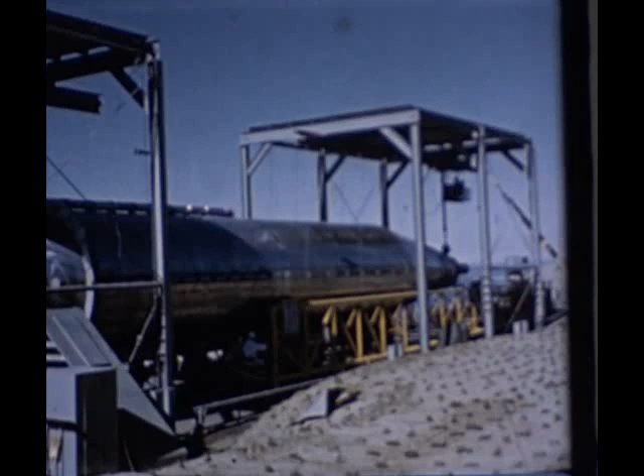The weapon system consists essentially of surface-to-surface ballistic missiles, their handling and transportation equipment, their launching installations and equipment, their ground-based guidance elements,

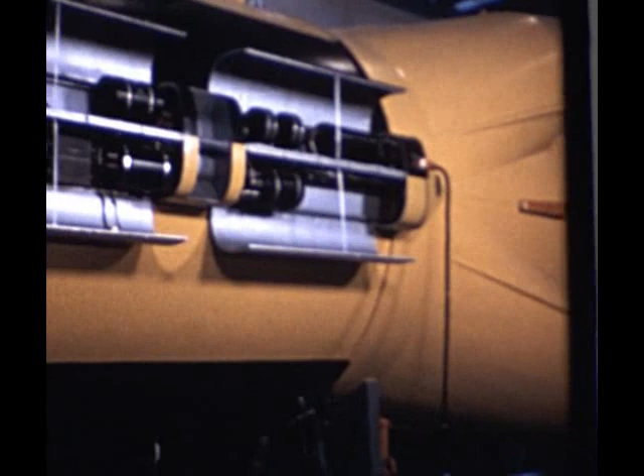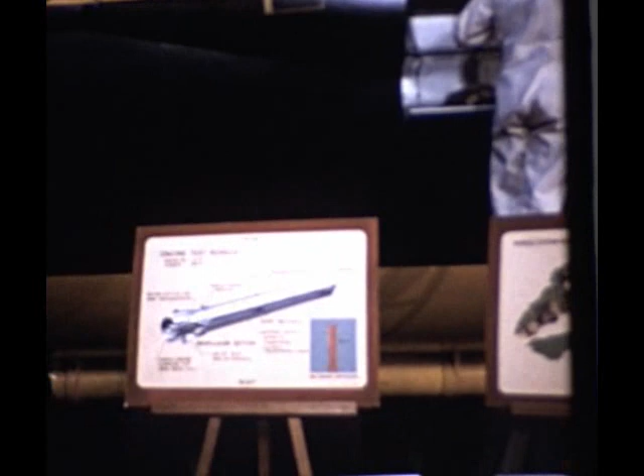missile-borne guidance elements, and operations bases and associated installations, facilities, and equipment.

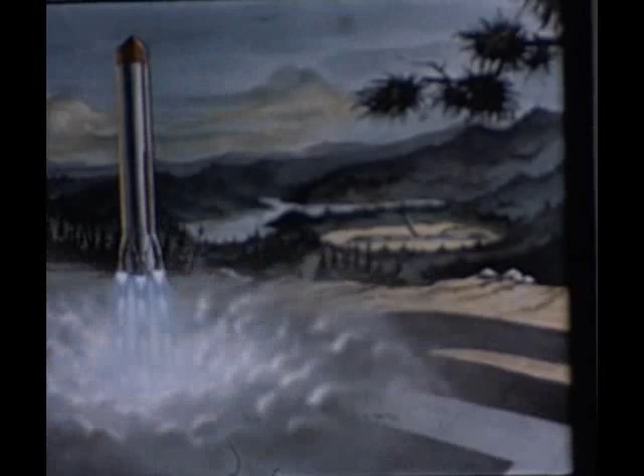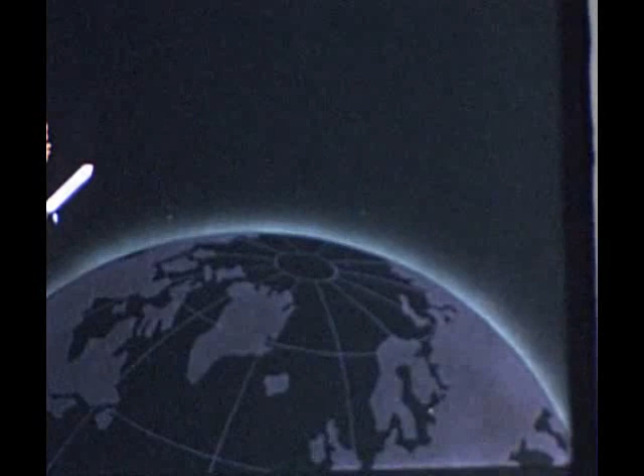The missile is launched vertically and guided during powered flight to coincide at a power cutoff point above the atmosphere with a ballistic trajectory from this point to the target. Guidance and propulsion end simultaneously at this point, some 5 minutes after launching, and the nose containing the warhead is separated to continue for another 25 minutes in a free fall along the gravitational ellipse.

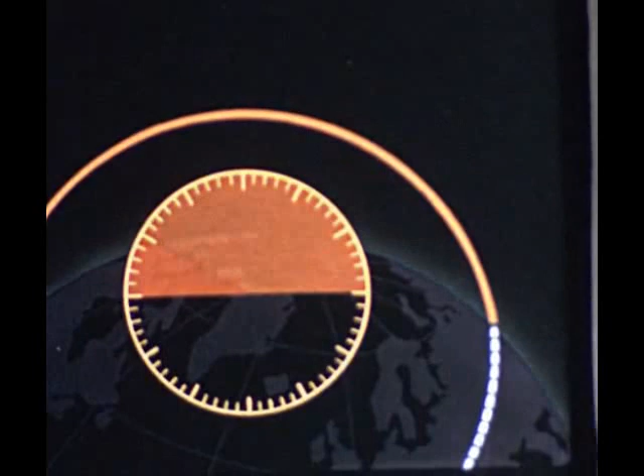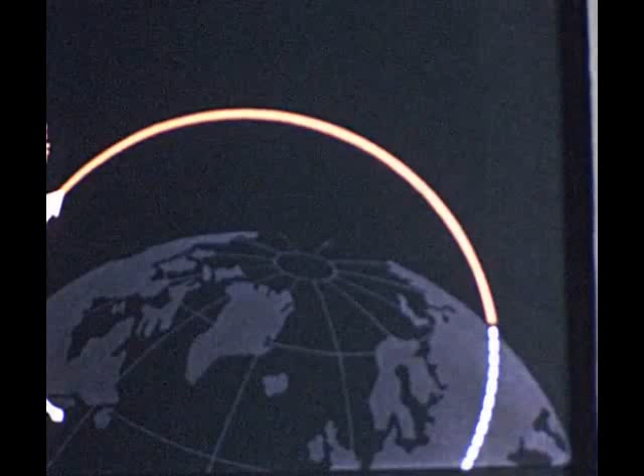The entire guidance problem therefore consists in providing the missile with the correct heading and speed at power cutoff while still over friendly territory. A programmed autopilot stabilizes the missile and directs it onto the correct heading, and an integrating accelerometer cuts off the propulsion when the missile has attained the correct speed.

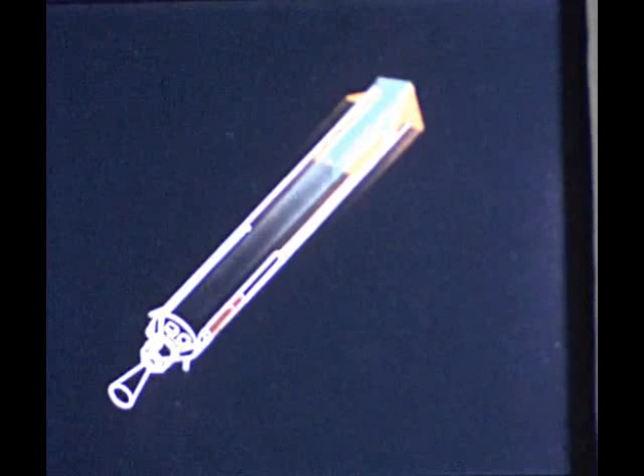If these inertial elements can be developed to the required precision, they will be self-sufficient. Or they can be built with components now available and radio-supervised by command-control signals from a precise microwave tracking and computing station on the ground.

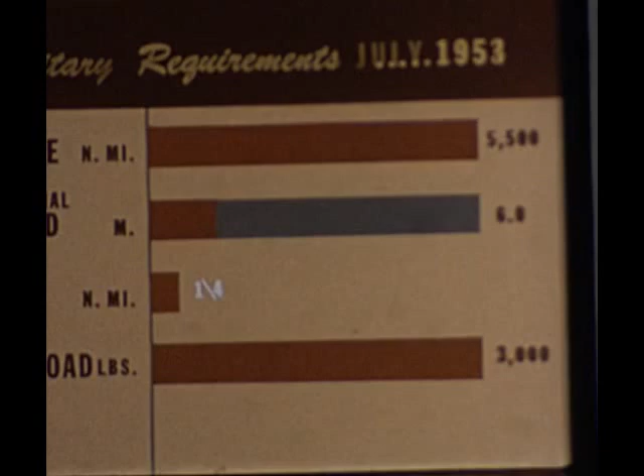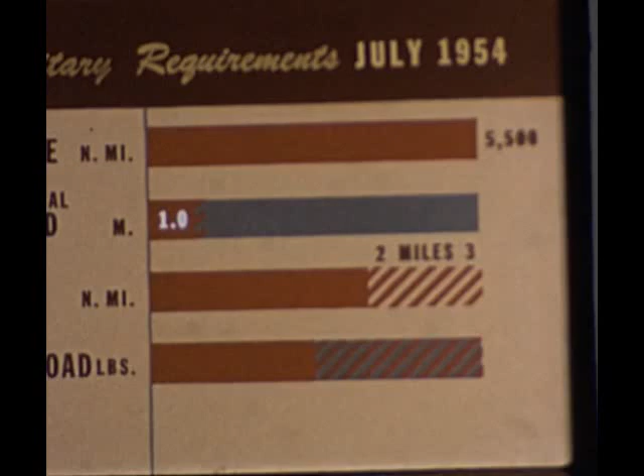The Atlas military requirements were under continual review during the period of this report. Some of the requirements were relaxed to provide for a missile with a range of 5,500 nautical miles, a terminal speed near Mach 1, a circle of probable error of from 2 to 3 nautical miles, and an atomic or thermonuclear warhead weighing between 1,500 and 3,000 pounds.

From July to October, development effort was accelerated on the components of a 1.5-stage missile, the XB-65, that could deliver a warhead weighing up to 3,000 pounds. A full-scale body section was built to verify the design, construction, and dynamic characteristics of the pure monocoque airframe, and to test some of the missile handling and transportation arrangements.

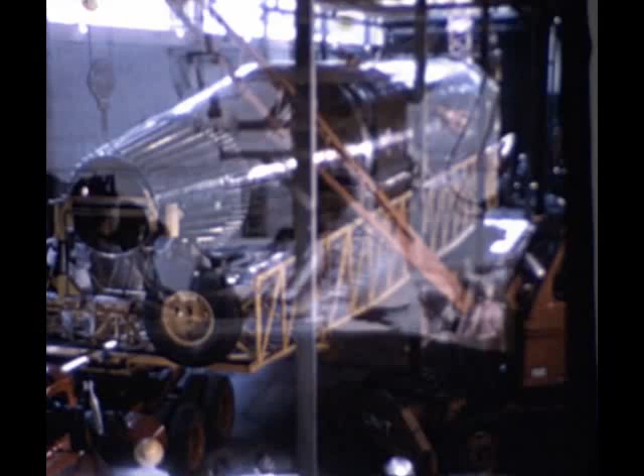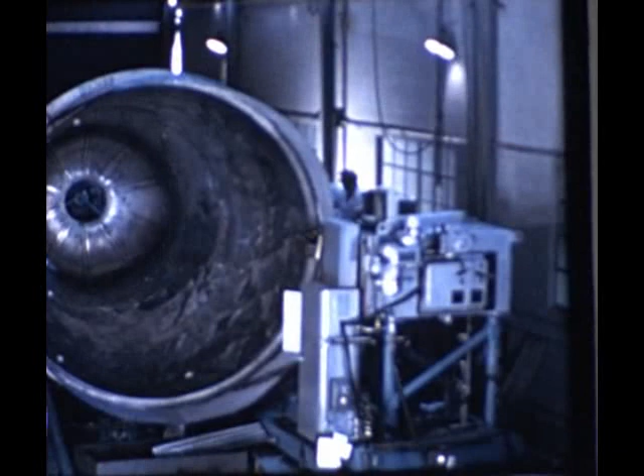The walls are thin stainless steel, varying between .016 and .040 gauge. The cylinder is divided by a bulkhead to form 2 integral tandem tanks for the fuel and oxidizer. The work is positioned in the fixture by fiberglass tooling rings, cemented to each skin section as it is added.

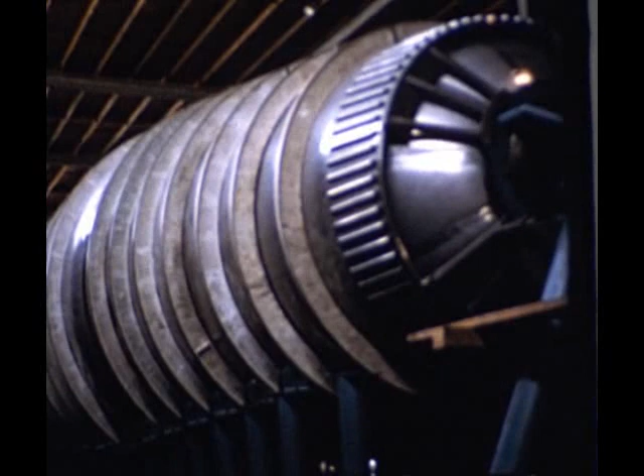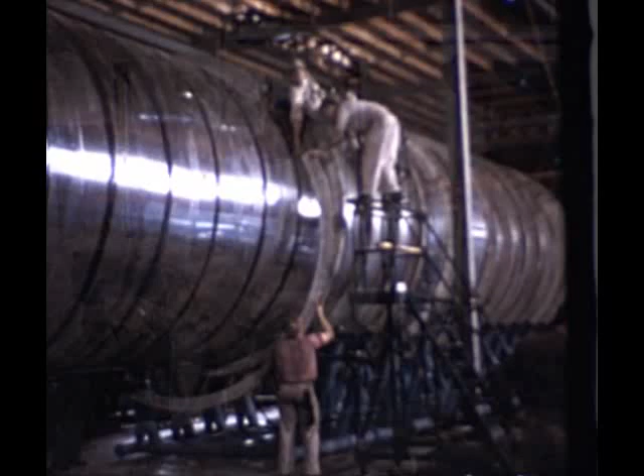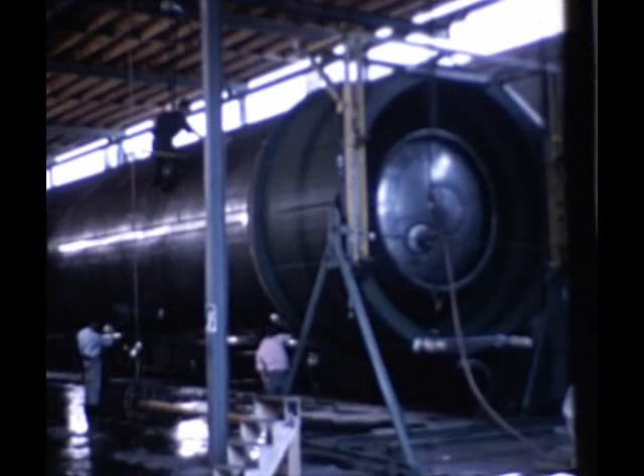When welding has been completed, the fuel and oxidizer tanks are pressurized to provide the necessary stiffening. The tooling rings are then removed, and the pure monocoque cylinder is supported only at the extreme ends. It is 75 feet long and 10 feet in diameter, and weighs only 5,700 pounds.

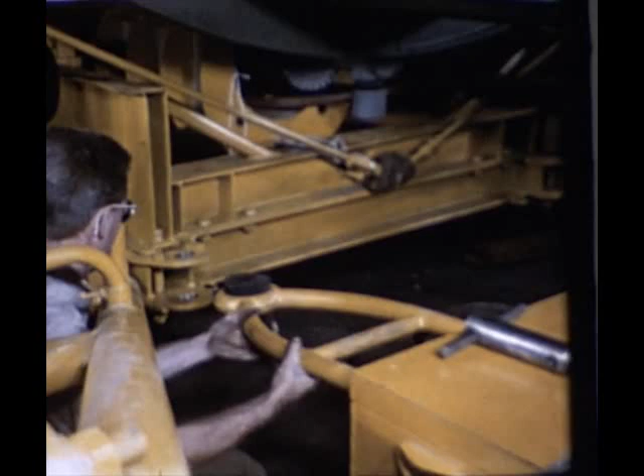When the external fittings have been attached, the pressurized tank is loaded onto the handling trailer, where it is also supported only at the ends. The specially designed pressurization trailer is attached to automatically maintain the correct tank pressures in transit. Here we see workmen walking freely on top of the pressurized tank while covering it for the trip to the test site.

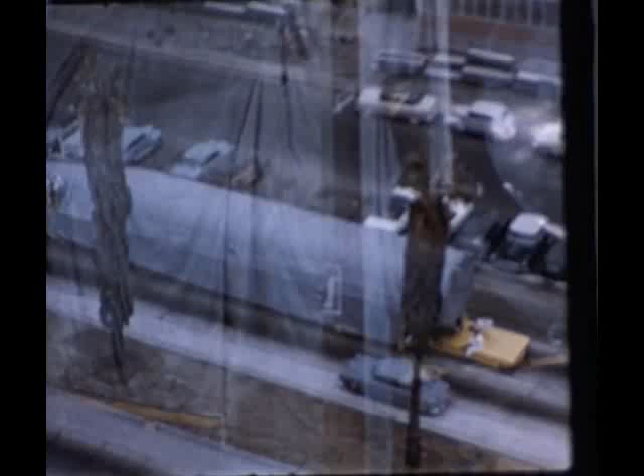En route to the test site, the loaded trailer negotiates normal city streets and traffic without incident. The rear wheels of the trailer are power steered by dual steering wheels, enabling it to make an uninterrupted turn around this 150-degree downgrade bend in the narrow road approaching the test site on Point Loma.

The test site occupies about 2 acres of military reservation on the seaward side of the point. It was completed in September, especially for the Atlas tank test program. Besides the 120-foot tower for vertical pressure, flow, and drop tests, it includes 2 metal storage sheds, a reinforced concrete control center, and a horizontal fixture for weight, balance, and vibration testing.

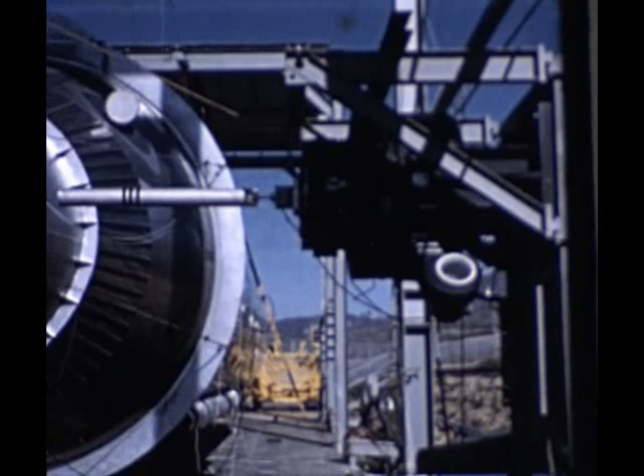After dummy nose and engine masses are attached for dynamic simulation, the test article is installed in the horizontal test fixture. Tests are then conducted for determination of the vibration modes and frequencies. Later, the test article is reloaded on the trailer for transfer to the vertical test fixture.

By releasing the tension in the upper of these aft extension struts of the trailer, the entire tank structure can be stretched by its own weight in order to depressurize it for inspection and modification.

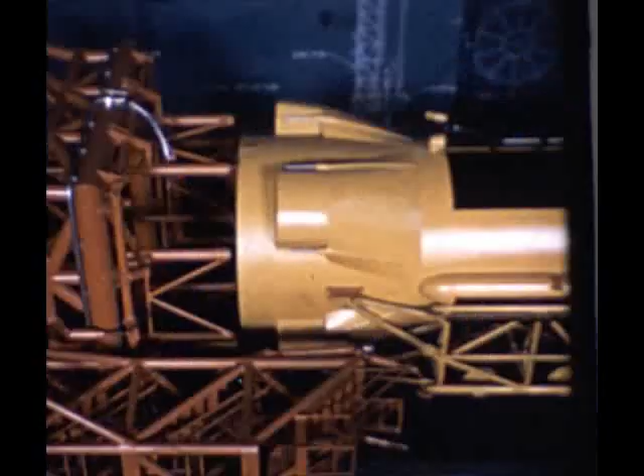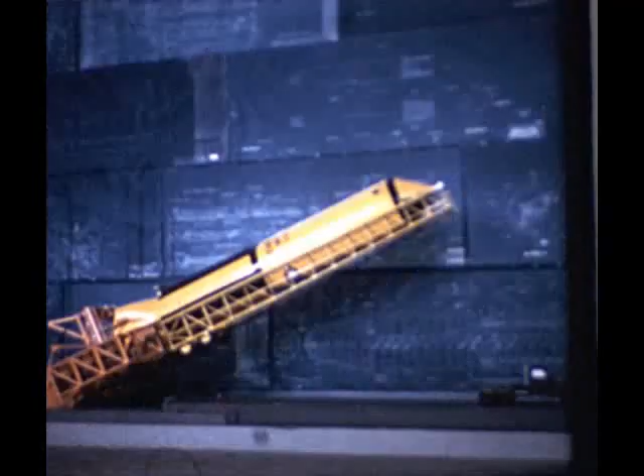The trailer is also designed to be used as part of the cantilever arm for erecting the missile on the launcher in the pressurized condition, as demonstrated here with a 10th scale model of a proposed Atlas flight test vehicle. This use of the trailer avoids the necessity of adding the weight of erection fittings to the missile.

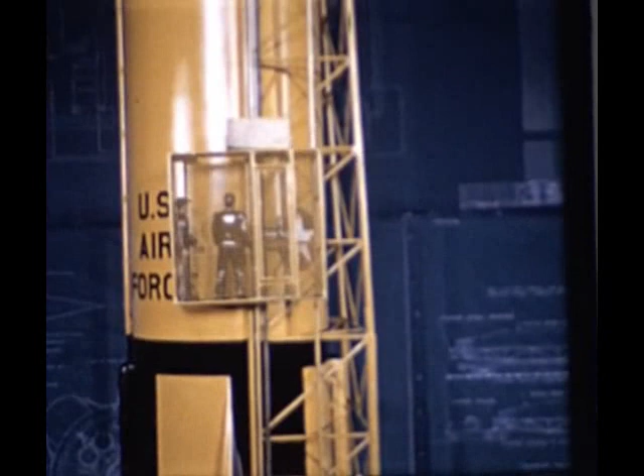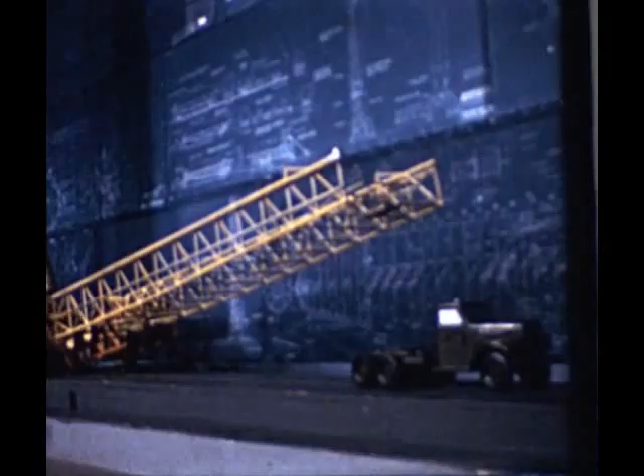Built-in powered elevators on the missile trailer provide access to missile components and systems for pre-flight preparations. The trailer workstand is kept in place on the launcher until all such preparations have been made, when it is lowered back to the ground. The trailer is detached from the launcher arm and hauled clear for the launching operation.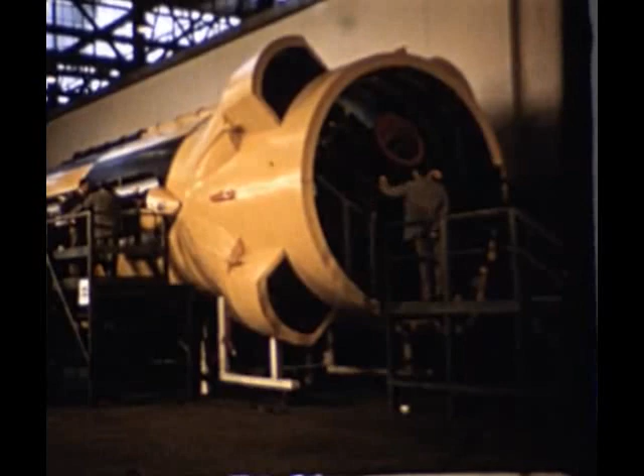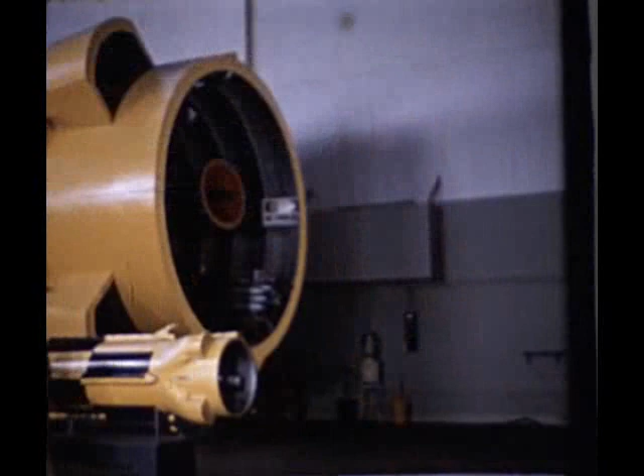In the program review in July, a mock-up of this proposed flight test vehicle was authorized, and on 9 and 10 November, it was officially inspected by the Air Force Development Engineering Board. The proposed test vehicle was designed to provide data on single-engine propulsion system performance in flight, but incorporated a number of other basic design features of the operational missile.

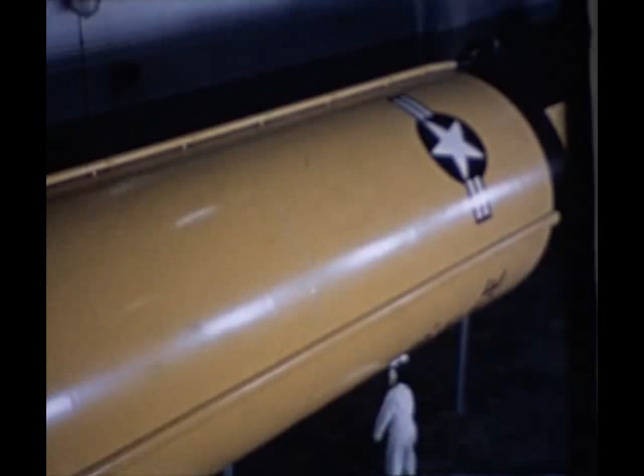In this design configuration, the missile is 82 feet long and 12 feet in diameter. Its launching weight is 80,000 pounds, of which 66,200 pounds are propellants, JP4 gasoline, and liquid oxygen. The test nose serves mainly as a fairing for the missile body and is non-separable in flight. The body or tank section is of the same lightweight stainless steel construction as the Model 7-4 test article and is continuously pressure stressed in the same manner.

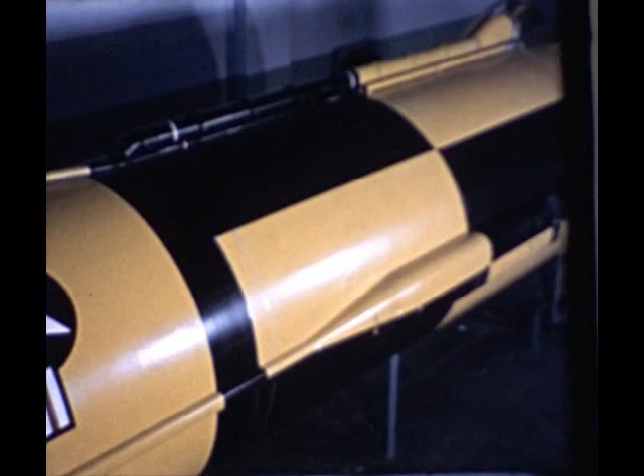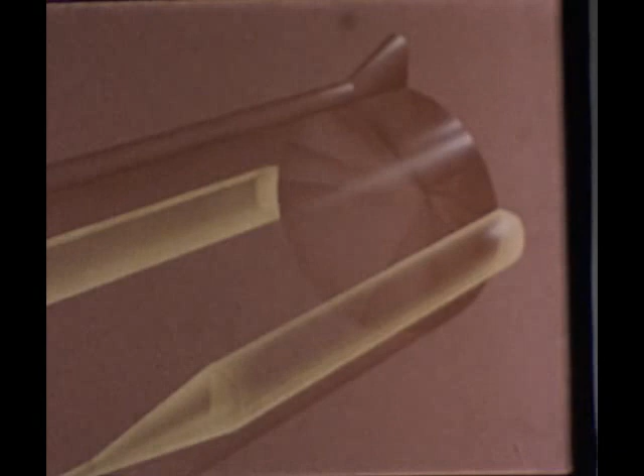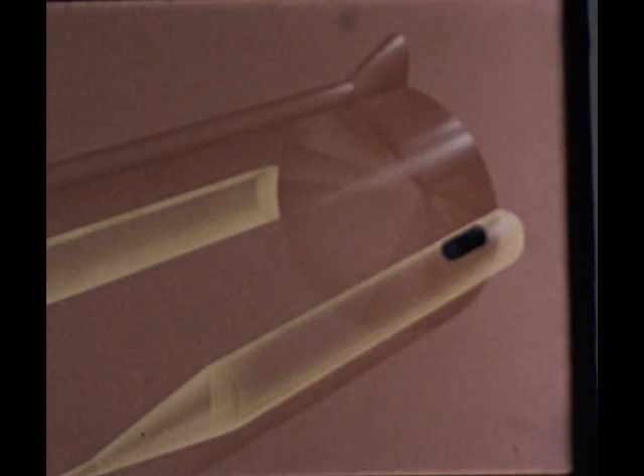Plumbing, wiring, and electronic equipment are all mounted externally in 2 equipment pods, one on each side of the body. As a reliability feature, both of the pods contain a telemetering and a command-destruct system, each complete with its own power supply and antenna. The aft section of one pod contains the electronics package for the fuel and oxidizer ratio control system. The opposite pod contains the primary power battery, a DC to AC inverter, the electronic and inertial elements of the autopilot system, and a radio microwave transponder.

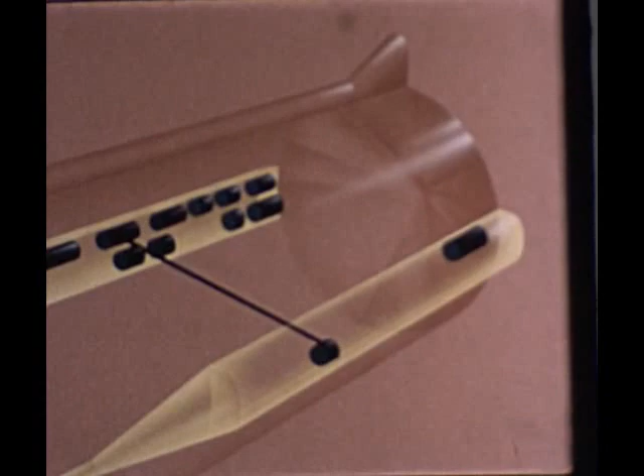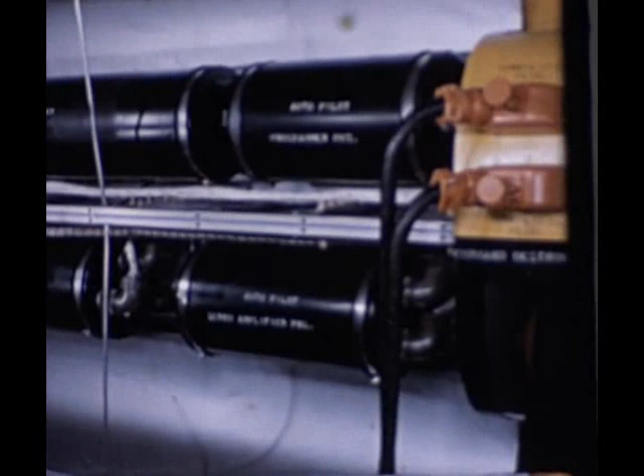The transponder, which generates signals and relays data for radio microwave tracking, has been developed by refining an earlier Convair transponder for use in the first Atlas flight test vehicle. The autopilot system consists of a multiple gyro unit, a programmer, a servo amplifier package, an integral control unit, and an electro-hydraulic servo system.

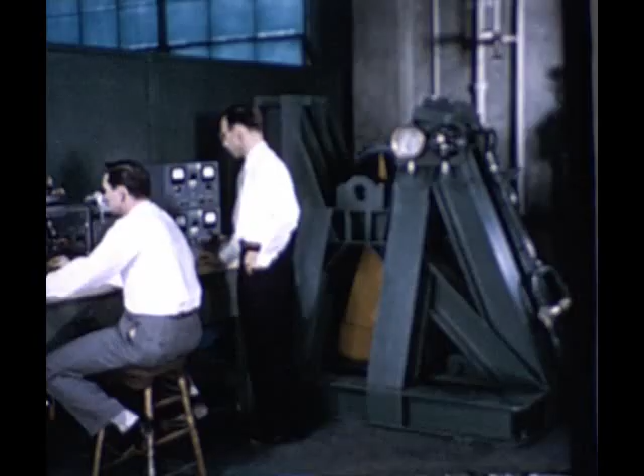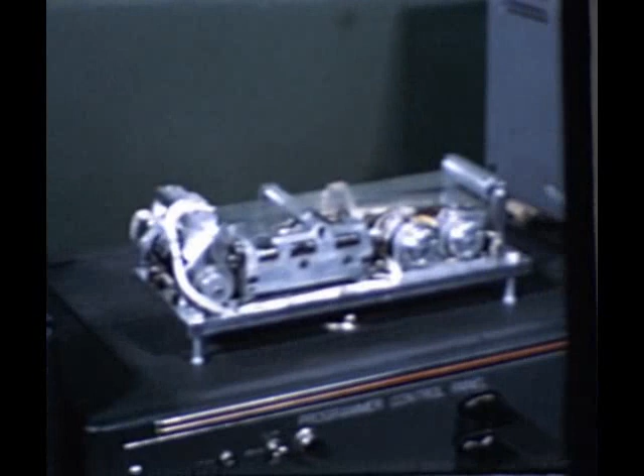This single-axis laboratory model of the autopilot system is used to study its stability. The gyro unit senses deviations in missile attitude and originates corrective signals which are fed to the programmer. The electronic programmer reads flight instructions from time-keyed perforations pre-punched into a film loop. This experimental model has operated satisfactorily for over 2,000 cycles in the laboratory.

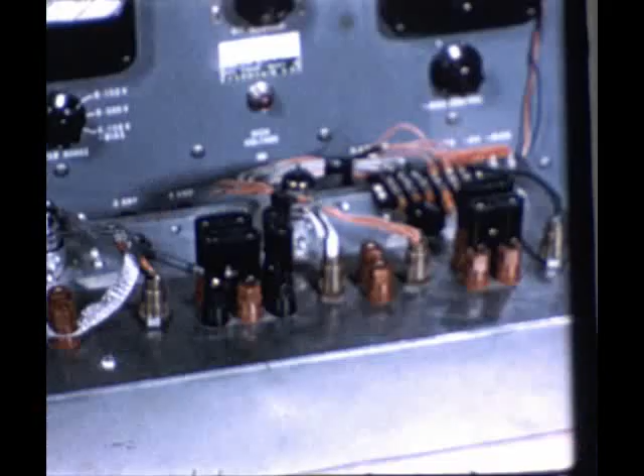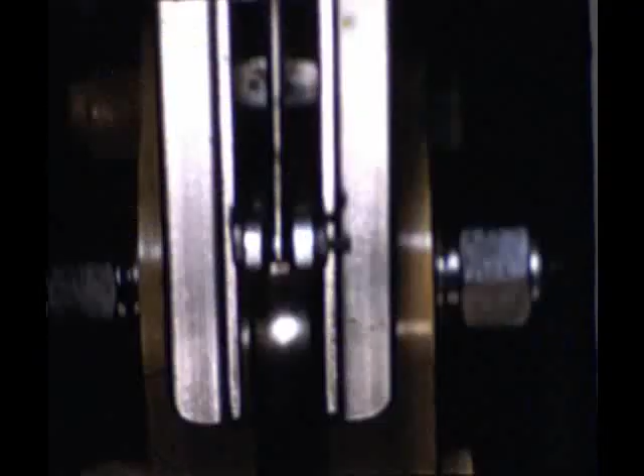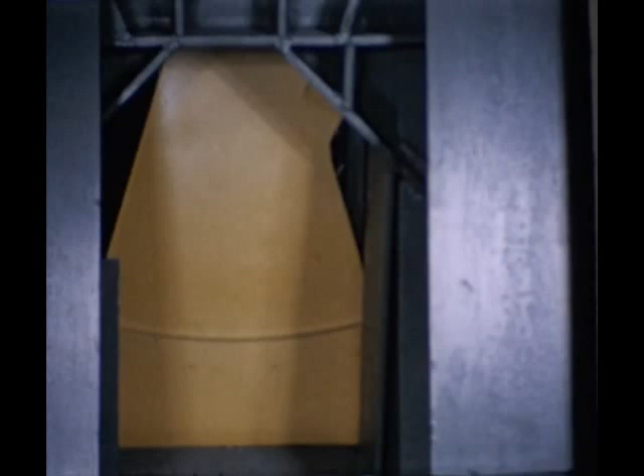Programmer output signals are fed into the servo amplifier, which boosts the electrical signals and directs them to the servo valves. These valves regulate the pressure and direction of flow to the hydraulic actuators. The main engine actuators position the engine thrust chamber in response to the pitch and yaw signals generated by the gyro unit. The heavy pendulum represents the actual engine mass in the test rig. Portions of this analog computer are used to introduce missile response and flight dynamics into the circuit to close the test loop.

Translated to the missile, the system operation presents this appearance. The missile has no aerodynamic control surfaces. Although the propulsion section skirt is not jettisonable in the test vehicle, it is identical to the skirt used in the XB-65 to mount the booster engines and their accessories. In the operational missile, these are jettisoned with the skirts at the end of the booster propulsion stage, while the center engine continues to furnish sustaining propulsion. This is known as the 1 1/2 staging technique.

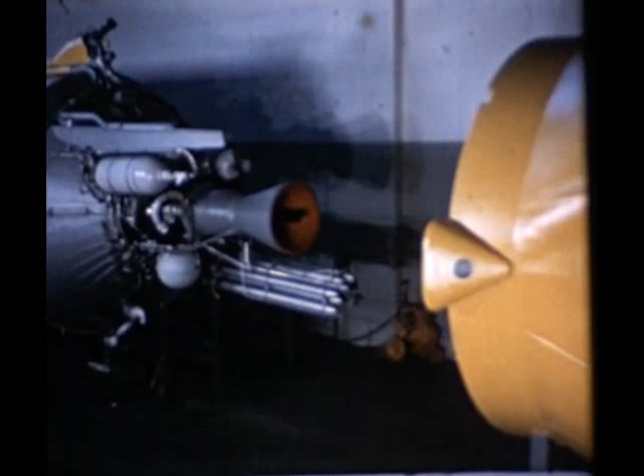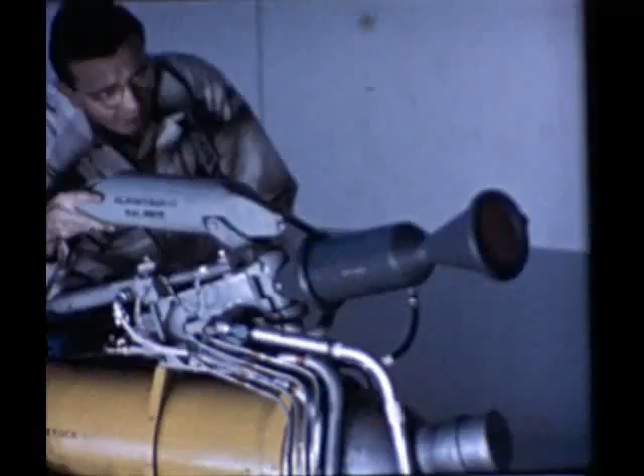Shortly before the required cutoff velocity is reached, the sustainer engine is cut off, and final precise velocity adjustment is provided by 2 vernier rockets. Verniers have a nominal thrust rating of about 2,000 pounds each at sea level. In the test vehicle, they are swiveled tangentially by the autopilot for roll control. In the operational missile, they are gimbaled for perpendicular movement as well, to provide precise attitude adjustment during the final or vernier stage of propulsion. The stop valves are pneumatically operated by solenoids to achieve instantaneous thrust decay at final power cutoff.

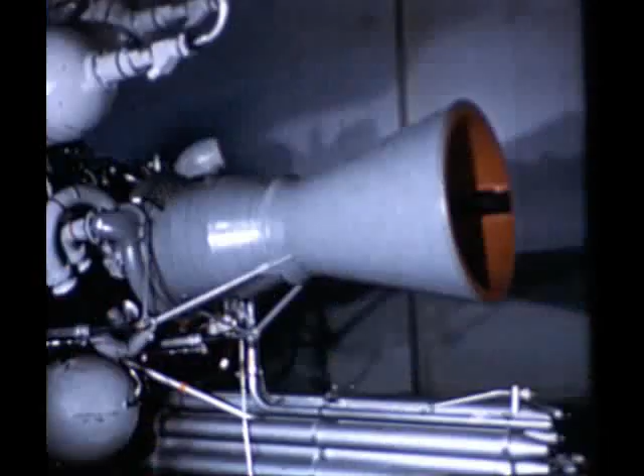The test vehicle main engine, of which this is a full-scale mock-up, is a liquid propellant pump-fed rocket now under development by North American Aviation as associate contractor. The turbopumps are driven by a gas turbine and generator using the main propellants. Pneumatic pressurization of tanks and engine control lines is furnished by helium flasks charged to 3,000 pounds per square inch. The propulsion system is capable of producing more thrust for about 3 minutes than 8 J-57 jet engines with afterburners at full power.

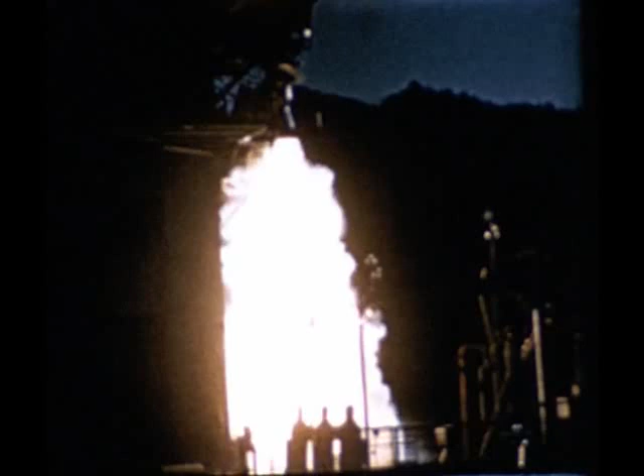Development testing of this rocket engine has been carried out at the Santa Susana test facility during the report period. In some of these tests, the engine produced its rated sea level thrust of 135,000 pounds for periods up to 63 seconds, the capacity of the existing propellant tanks.

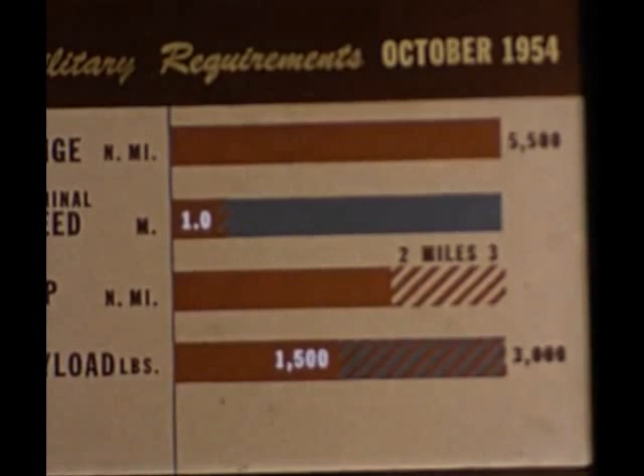In anticipation of this, an intensive design study was begun in September to determine the most suitable of several vehicle configurations for delivering the much lighter warhead. Upon review of these design studies by the Air Force in December, a decision was made to proceed with the development of a smaller 3-engine 1 1/2 stage missile to be designated the SM-65. It will have the same military characteristics as the XB-65, except for the lighter warhead.

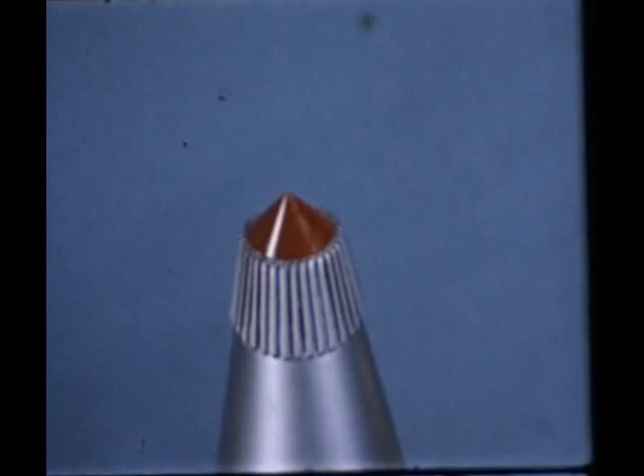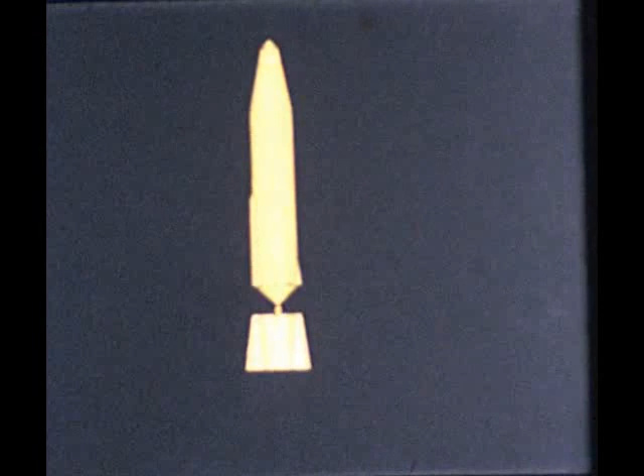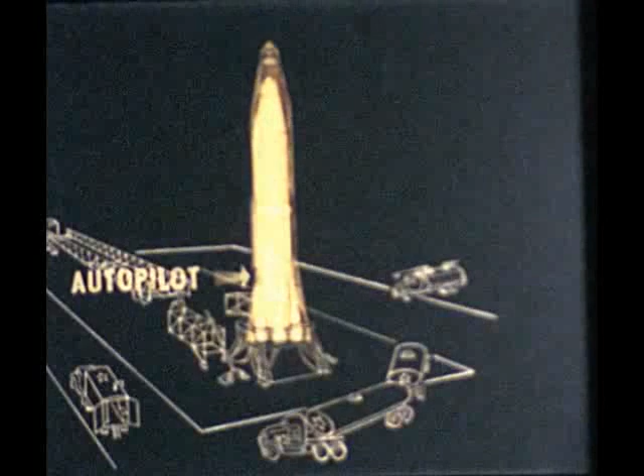By adhering to the 1 1/2 staging technique, the basic design features we have examined will be retained. Thus, the development accomplished to date on the monocoque body structure, the autopilot and propulsion systems, and the launching, handling, and ground support equipment is directly applicable to the new configuration.

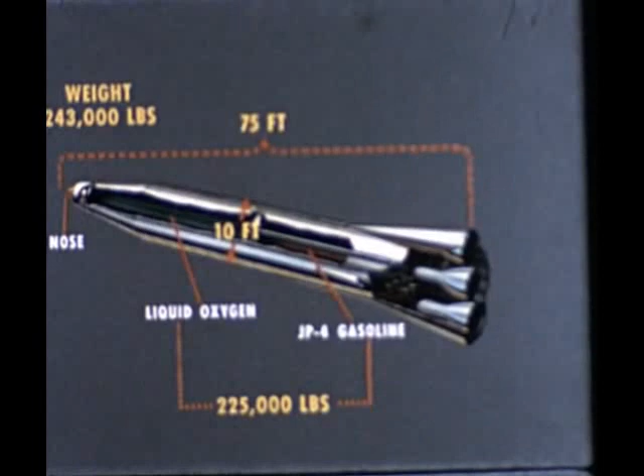The SM-65 will be 75 feet long overall, 10 feet in diameter, and weigh 243,000 pounds at launching, of which 225,000 pounds will be JP4 gasoline and liquid oxygen. The nose, including the warhead, will weigh 3,500 pounds.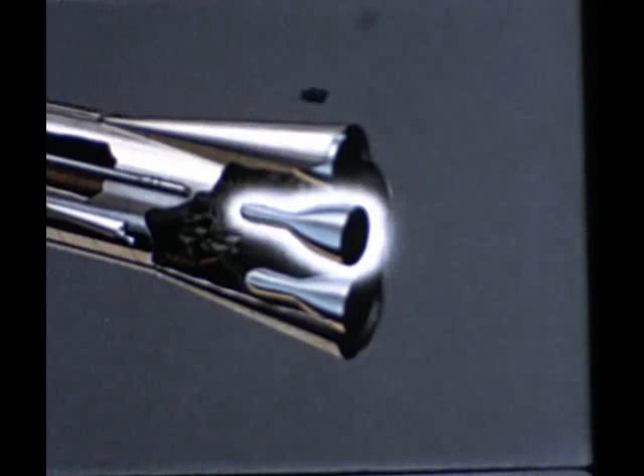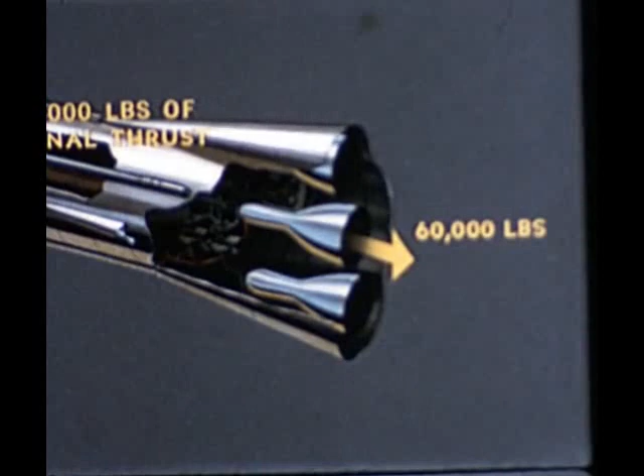Two booster, one sustainer, and two vernier rocket engines will furnish a total of 362,000 pounds of nominal thrust at sea level. 60,000 of this will be from the sustainer engine, and 300,000 from the two booster engines of an improved North American design.

The gimbaled booster engines and verniers will be used for flight control during the booster stage, and the gimbaled sustainer engine and verniers during the final stages. All engines will be started on the ground, as in the XB-65.

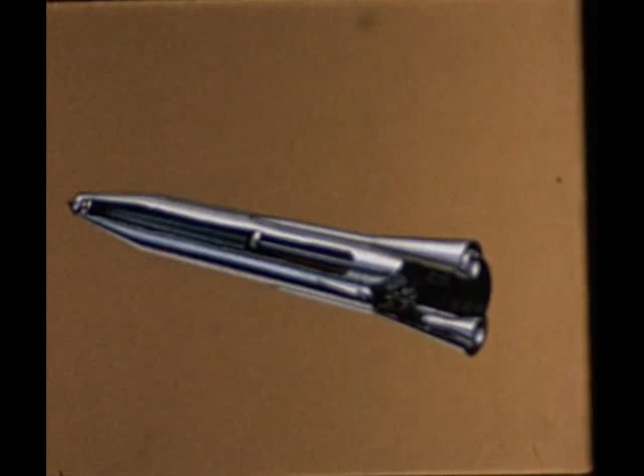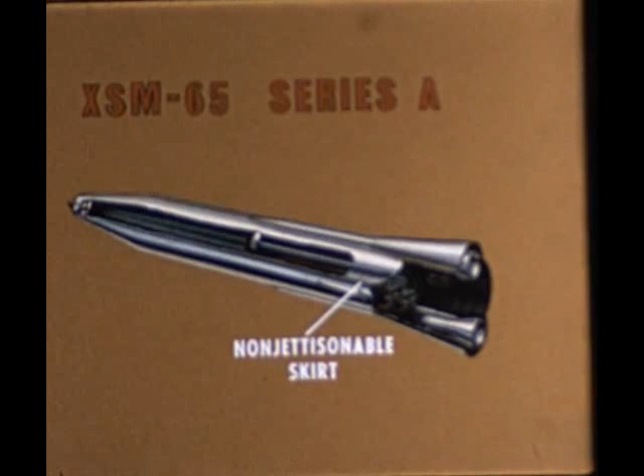A full-scale mock-up of a two-engine test vehicle based on this configuration is being built for Development Board inspection in May 1955. This test vehicle, the XSM-65 Series A, will be unstaged and powered by two booster-type engines of an existing design installed in the non-jettisonable skirt. It will have a programmed autopilot for flight control and dual telemetering and destruct systems.

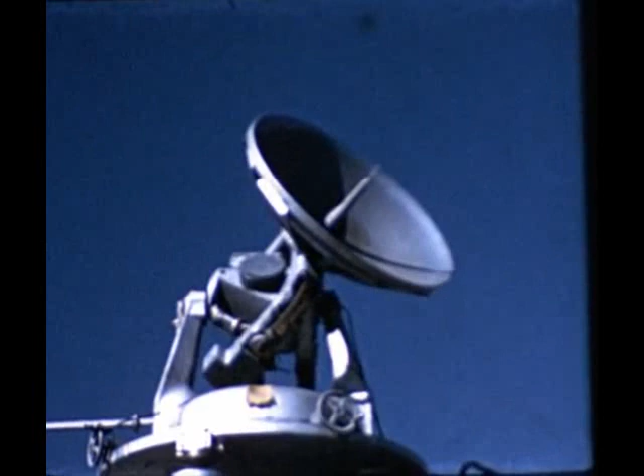Meanwhile, research and development in the general field of ballistic missile guidance has gone steadily forward. Convair has been developing a radio-supervised inertial system based on existing inertial elements and the company's extensive experience with microwave phase comparison tracking techniques. A 5,000 megacycle signal generated by the local transponder in the foreground was successfully tested with this antenna arrangement built on a single base line. One antenna is a conical scan type, and the others measure direction cosine.

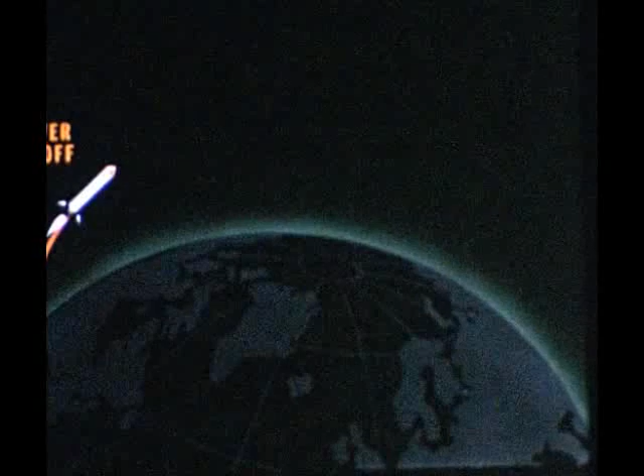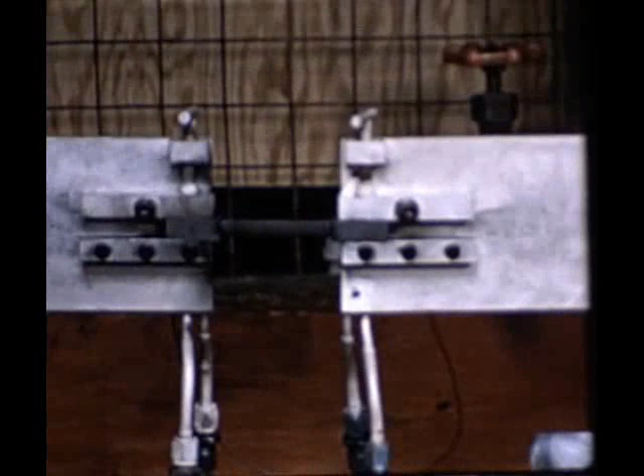In the general field of aerodynamic heating research, applicable to the SM-65 nose reentry problem, several approaches are being explored simultaneously. Convair has been investigating both heat sink and transpiration cooling techniques in the 120-inch solar furnace and in the new 60-inch solar furnace. This resistance heating rig and this 20-kilowatt induction heater at Convair were used to produce surface temperatures in specimens of dense graphite up to 6,500 degrees Fahrenheit.

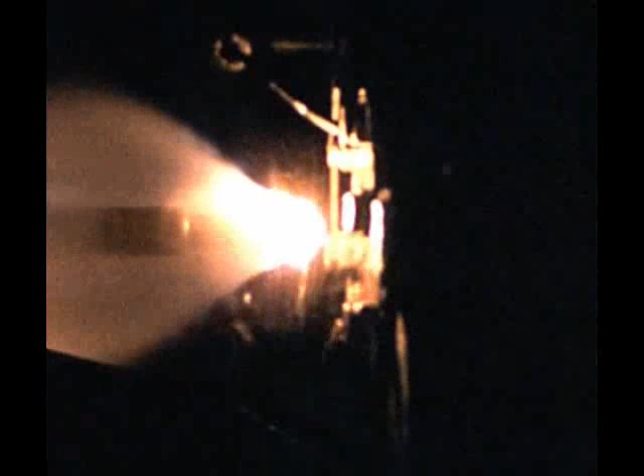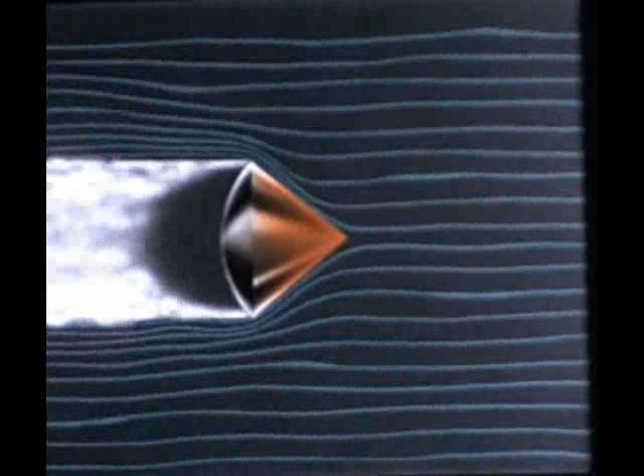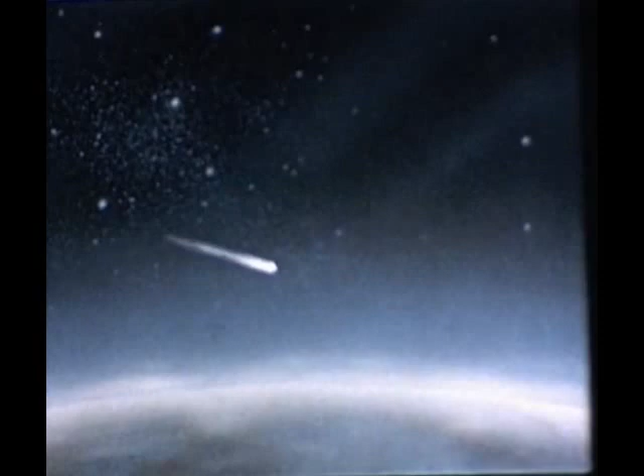This environment of the meteorite is a new frontier in the science of flight, and much remains to be learned of it. But progress on the project during the July to January period would indicate that nose cone heat protection will be added in time to the accomplishments we have seen in this period.

Reduction of warhead weight, selection of a basic configuration, mock-up of an engine test vehicle, autopilot system development, electronics and instrumentation design, handling and transportation trailers, and monocoque body construction and testing. All advance the date when the United States Air Force will be able to destroy any target within 5,000 miles of bases within the United States in less time than it has taken to view this report.